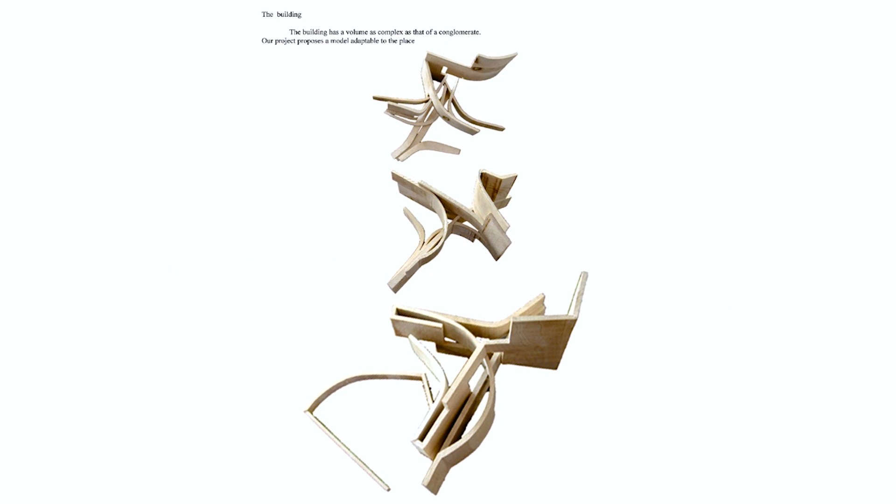This man here, I don't remember his name, but he was the one who recruited us. I really don't know how he decided to come with us to do a high-rise. And CalTrans, of course, is California Transportation, and we were very seduced by these nodes and this fantastic highway crossing that, of course, is a symbol of LA.

With this material in mind, we were trying to imagine how a new high-rise dealing with CalTrans could be. So we were imagining fantastic nodes on top of our heads, but then also fantastic vegetation and beautiful luxury, a lot of green. This was the first desire for this building, imagining this complex structure with a big heart in the middle, full of fantastic vegetation.

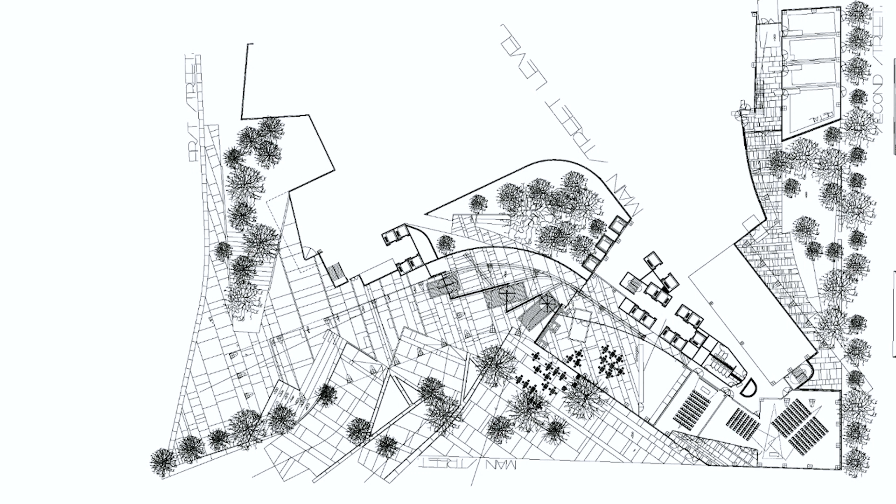So these were our drawings. Also, we were imagining giving a piazza, a public space in front of the city hall, introducing it to the building. So we were doing drawings like this one, where the piazza is the main thing, and also models like this, which little by little were leading us to imagine how these knots from the highways could be transformed.

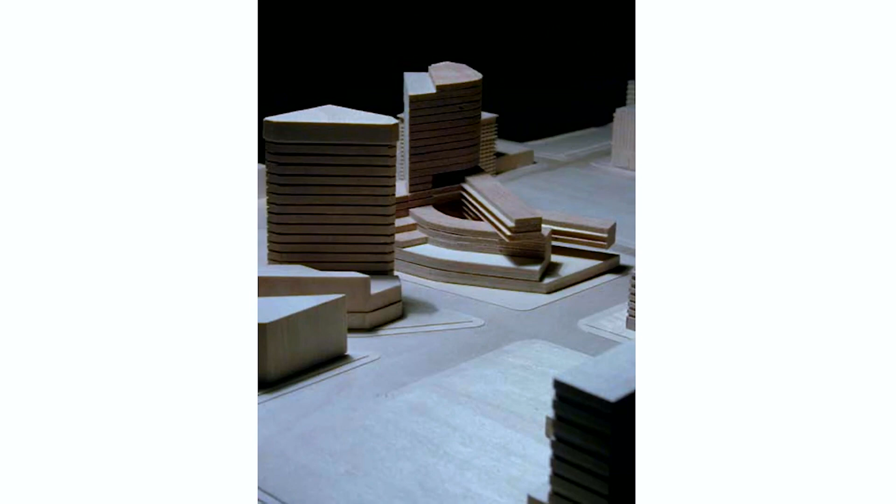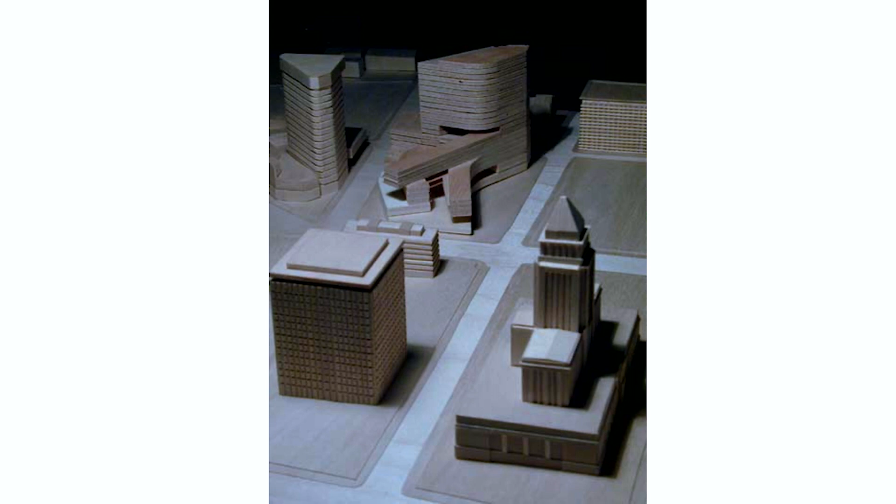Into a building which could be cheap enough to be accepted by the developer, who was actually our leader, and could relate to the rest of the high-rises and to this piece of downtown, and could be very extended on the plot, on the ground floor, and then becoming smaller and smaller, like a small tower, while going up in height. So this was our idea, and the piazza was a very important part.

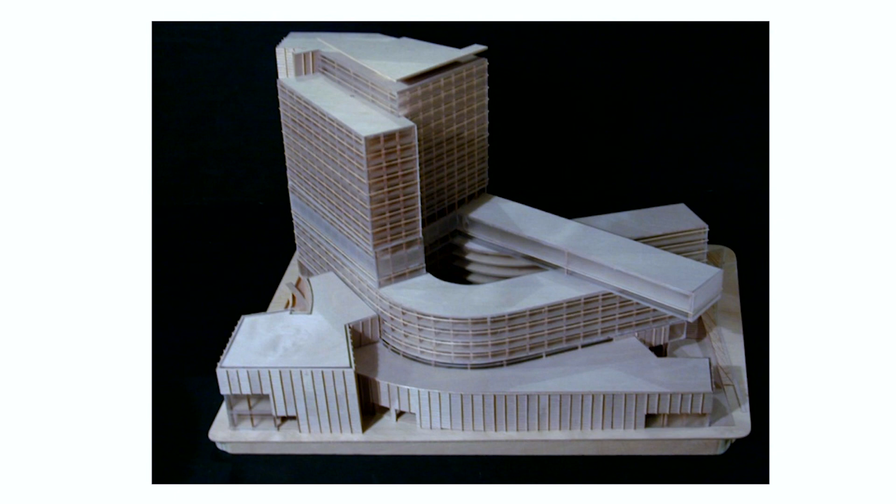These cantilever arms were kind of letting the piazza underneath, and we were imagining a lot of things, and this beautiful texture for the facade. Well, at the end we had to do this model that I didn't like at all, but never mind. We presented it, and it was real, and we had a wonderful possibility.

But then, as you know, Thom Mayne won the competition. And today I went to visit the Thom Mayne CalTrans. I think it's a beautiful building. Now, 20 more years after, I think it's a good thing that Thom won that competition. It was very logical, also very good.

At that time, the developer, who is this man there, arrived to the competition and he said, well, you listened to everything that we were trying to explain about the project. Well, actually, the budget doesn't do. So, of course, we won—we didn't win, we lost. And anyway, this was a fantastic experience.

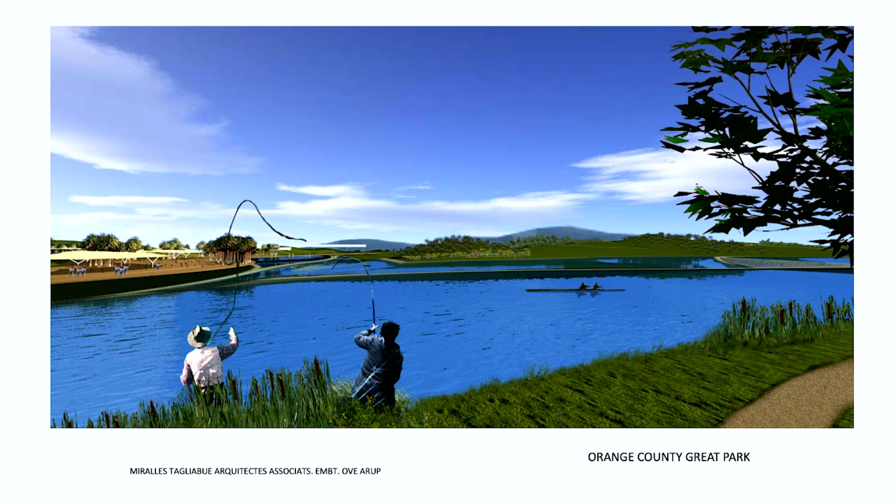And some years later, we were invited for a transformation of a military place in Orange County to become a new park, a fantastic possibility of a new natural place which could make the neighborhood rejoice in this beauty and also create a new life around that.

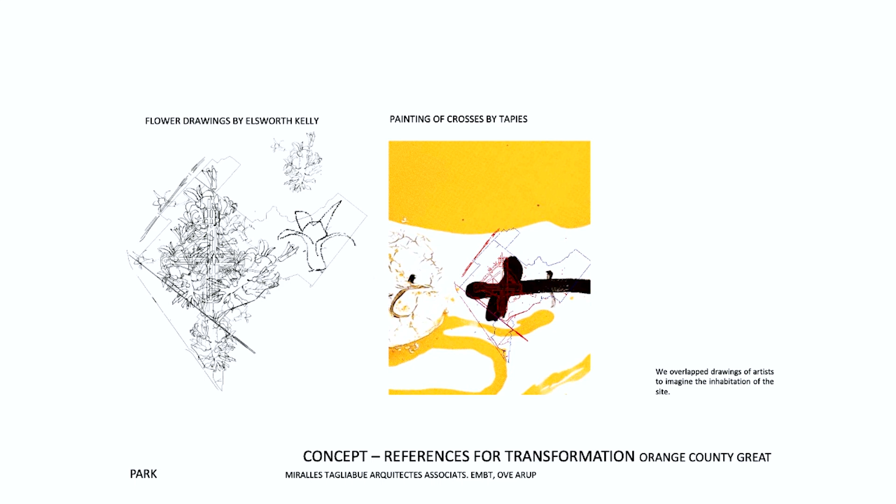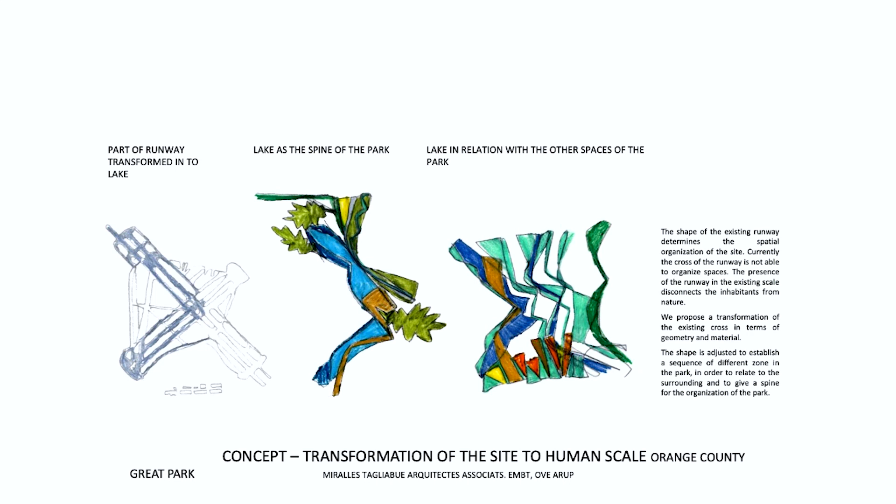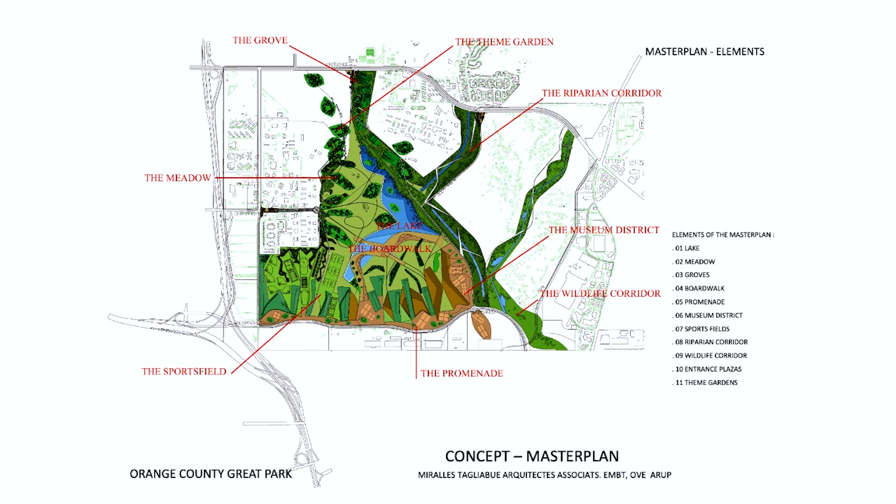So we were playing, I think, with Ellsworth Kelly, with Tapies, who is more from Catalonia, from Barcelona, where we come from. The idea was how to transform this very rigid military runway into a park, into a lake, how to make this become a natural line. So it was a very playful type of competition where we were imagining a lot of things happening, because this was absolutely enormous, very, very big.

So the present is rigid, the future is kind of introducing this organic, natural shape. And we were doing these colorful sketches which then little by little were becoming the drawing. We had this conversation, which was actually going very well. We arrived to the final jury after many conversations with the people. The jury even came to Barcelona, and we lost again.

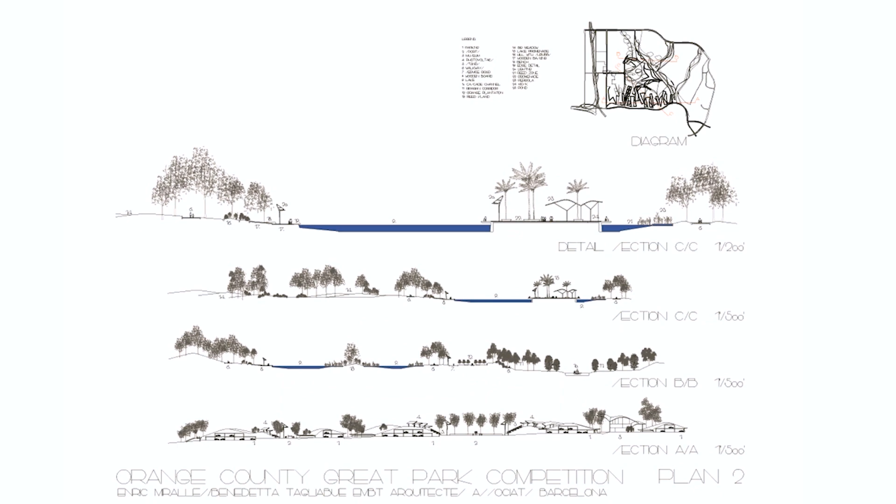But never mind, these are things which are happening, and all you learn through these competitions is very important. I put this drawing because I noticed that the structure is a little similar to the one you have in front of SCI-Arc, you know? It's a dream like that.

And we produced these models as usual, and this was the experiments we had in LA.

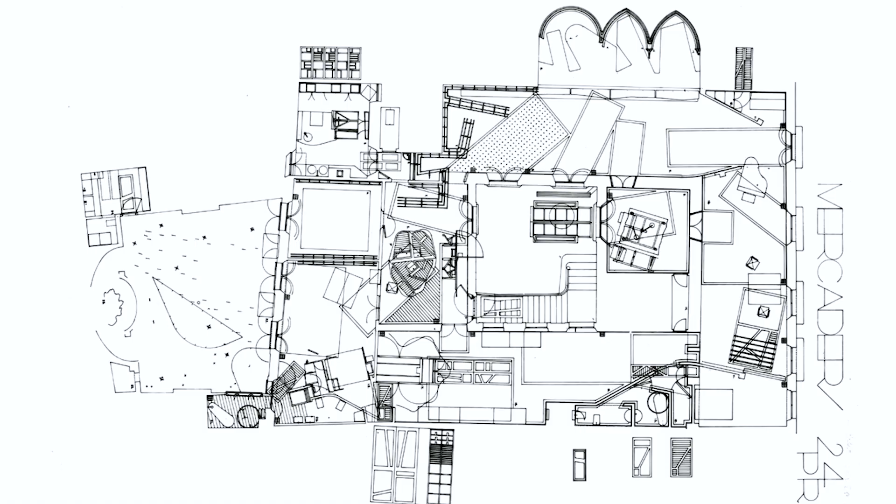But usually, I think we start our understanding of the world and our projects by our home. Recently, I understood that our home, and the experience of doing our home together with Enric Miralles in the 90s, in an old building in the old city which was abandoned and used as storage, is absolutely present in many of the projects we are doing till now. I think this discovering how to work with a pre-existence, how to put in value something derelict, and how to rework it, and discover that this architecture is fantastic with a lot of secrets you can discover, and try to live together with ancestors, let's say, with all these people who had been living there before us, understanding that we are only one more trace among the many traces that happened here in the past during more than 800 years, maybe more, because we are in the old city of Barcelona. So all this relation with the past, and how to feel this kind of humble feeling, was very important for everything we did afterwards.

Enric was working from here, well, only during weekends, because during the week we were in the office. He was in this fantastic position where he could control all the windows, a fantastic enfilade, and the house is revealing a kind of layers and layers, like a world behind it. So let's see, this is a little film. In spite of everybody, I was very attracted by these houses, which look so deteriorated from the outside, but with all these fantastic big spaces inside.

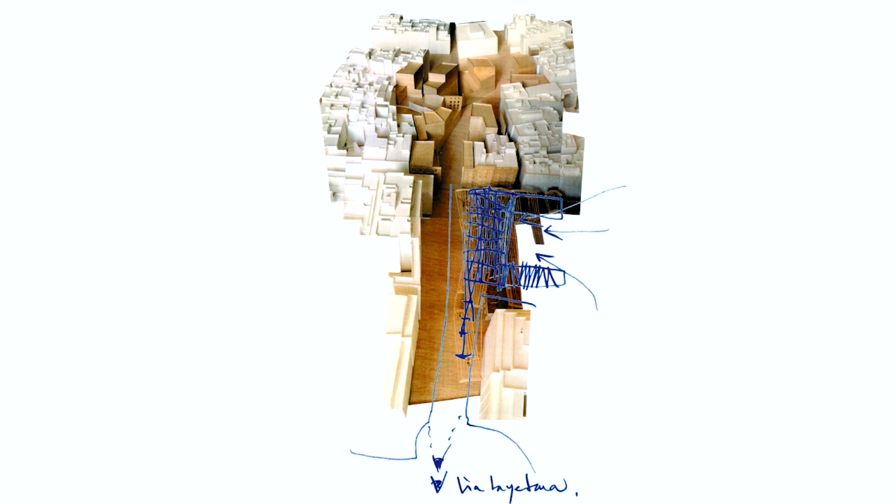So when we started to converse with the city, because they wanted to throw everything to the floor, we started to convince them that maybe the new buildings should be next to the old ones and learn from the old city, and also try to make the market expose the beauty of the inside to the outside. We were doing all of that because we really loved that piece of city, we really wanted it to become better, to be the extension of our home. Santa Caterina was a project that we really loved, and where we worked with a lot of attention and presence, with a degree of experimentation which maybe in another project further away wouldn't have been possible.

So we maintained part of the structures, but with new structure embedded. For example, you see this roof, the old parts of the roof are reused, but in a new structure. And the outside of the roof, we thought it would be fantastic if it could tell the city from a distance what a beautiful world it is inside. Because in a market, when I went to Barcelona, I was impressed — the market is a fantastic place where you have this world of fresh fruit, fresh food, a culture of eating. We thought this beautiful culture could be visible, could be put onto the building itself.

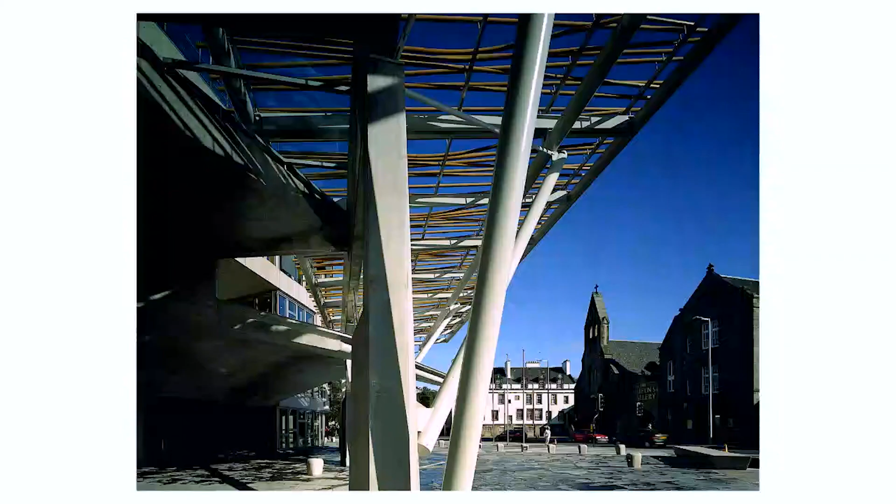Thank you very much, Hernán, for what you said about the Scottish Parliament. It was by far the most difficult building we have gone through.

Enric died in the year 2000. Really, the building was not even started - we had only started the foundations. And since then, it was a political fight all the time, very, very incredible. This morning we were talking about it. It was so complicated that I totally forgot about it, but if we had to remember it, wow, it would be a book about Scottish secret politics.

But at the end, I think it was worthwhile. I always had in my heart the idea that the building itself, at the end, would survive all the difficulties, all the politics, history, secret corruptions. A building like this with wood, kind of reminding a boat, because we had this idea that the parliament should be like a boat, with no real place, but like something navigating in the sea, would be something you could use the first day - as this is the opening - but also something that would go on influencing people for more and more years.

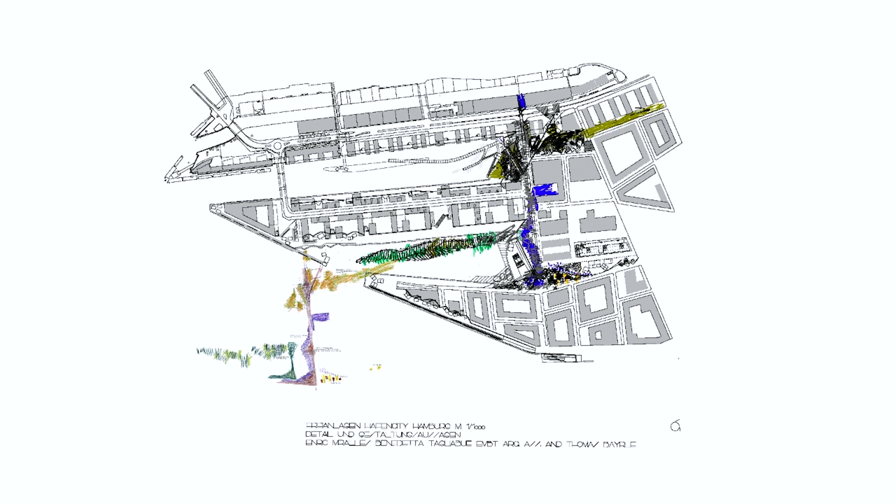So it would be fantastic to return this to the city, to return it to the people. We did a competition on the public space, on how to transform the public space of the Hamburg harbor in order to make it more permeable, to make people participate in more parts of it, to have floating piazzas in the sea, and to have the abandoned parts becoming beautiful natural places. After more than 20 years, these projects are still very, very slow.

No, they go on for years, we are still working on that. You see the southern part, we are still finishing that. But you can see that the drawing became a reality. In fact, the Hafencity is working and has this concept of entering again into the water, having this mix which was happening during the harbor time, between where you can stand on your feet and where you cannot because there's water. This mix makes the harbor become more near to the scale of the people.

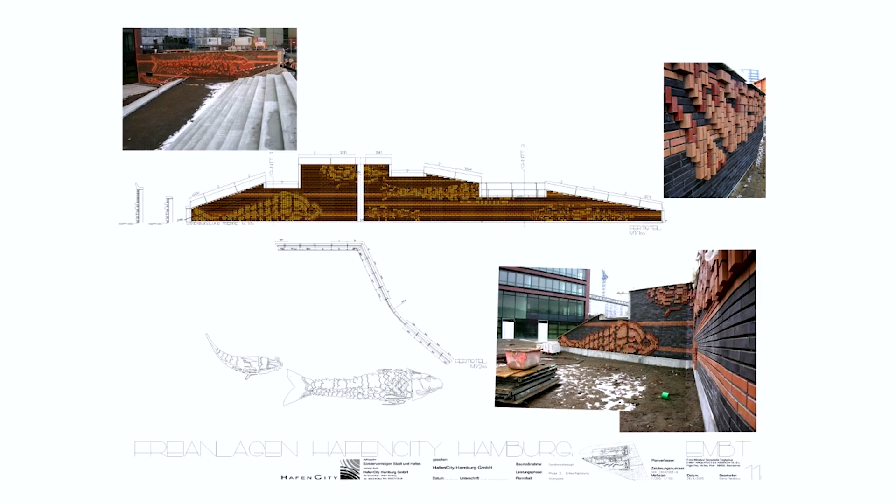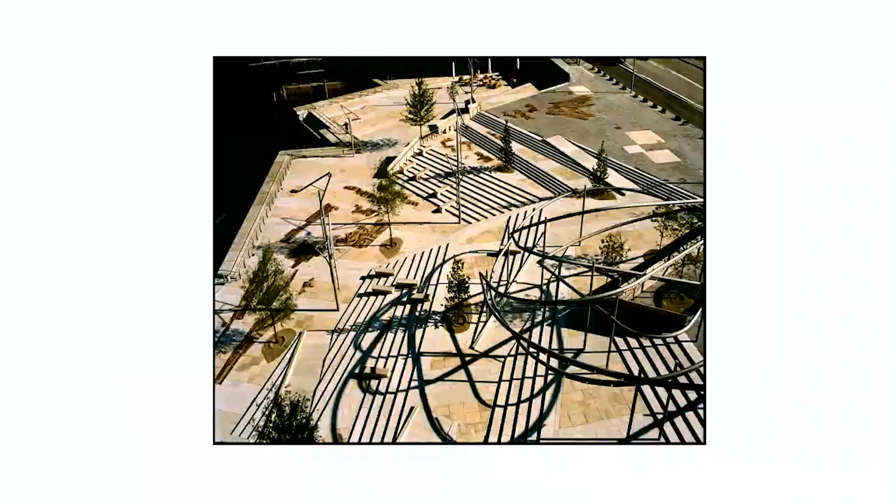We also did a lot of things on the walls, decoration with bricks, which was actually something traditional here. The Speicherstadt is very much about that. This is also with the idea of entertaining people and making people feel there's something to do, that these great distances are fulfilled with a lot of things happening, pavimentation changing, new lights and trees growing, and stairs bringing you little by little near the water, even if the floods are very dangerous.

But you can go near the water with special systems telling you, alerting you when the water is coming up. So I remember people in Hamburg at the beginning when we won the competition telling us, 'Oh, you're too Mediterranean. You think that in Hamburg we are like in Barcelona. Here is a very cold weather.'

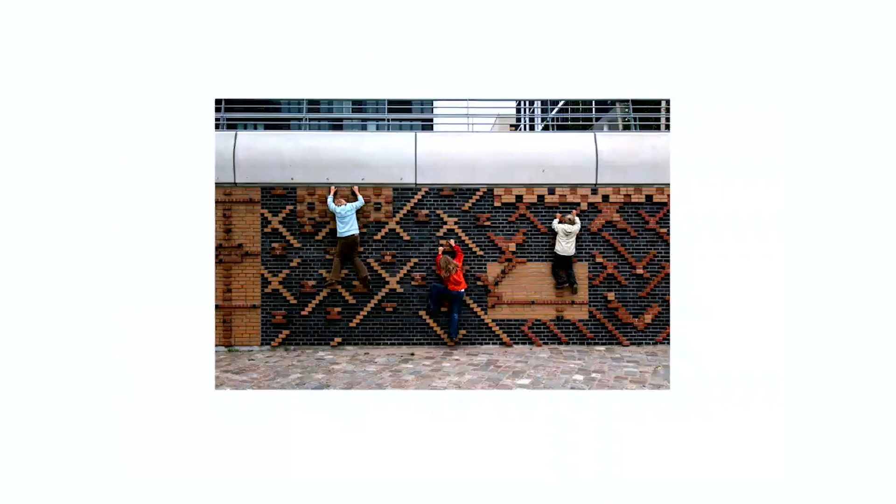But in fact, people now that it's built, the possibility to have a park, to have a space like that, makes people use the space and get the habit of going out, even if the weather is not like Barcelona. So I appreciate very much these images where people are actually using this harbor and all the features, and this is becoming really a lively city.

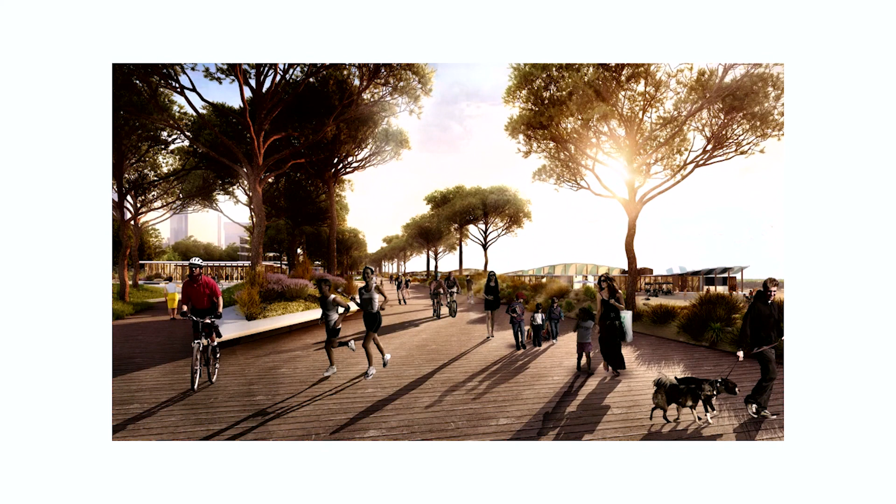And in Italy now, we are doing something similar, but in a totally different place. This is Rimini, which is the most massive seaside place in Italy. It was the place where, in the fascist times, they gave the idea that going to the seaside is healthy. Before, nobody was going to the seaside. But here they started, and they maintained this as a very massive activity.

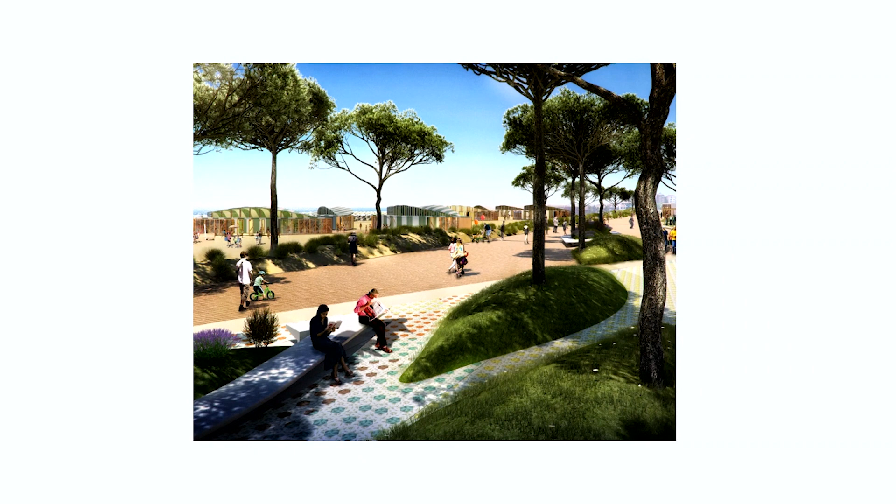So they had a kind of back street here where you see this natural place. Our project had to transform this back street in order to reconnect the city of Rimini with the seaside and make the seaside a little less massive, a little more transparent, so that you can start to see the sea again from the city.

So this is happening right now. You see on the lower part, the street that we are transforming into a kind of multi-purpose place where you have bicycles and people walking, but mainly you have this idea of the seaside as a natural place, where you can find trees, shadows, herbs that have a beautiful smell, you can go making sports, and you have a connection with the city on the other side, which before was really cut off.

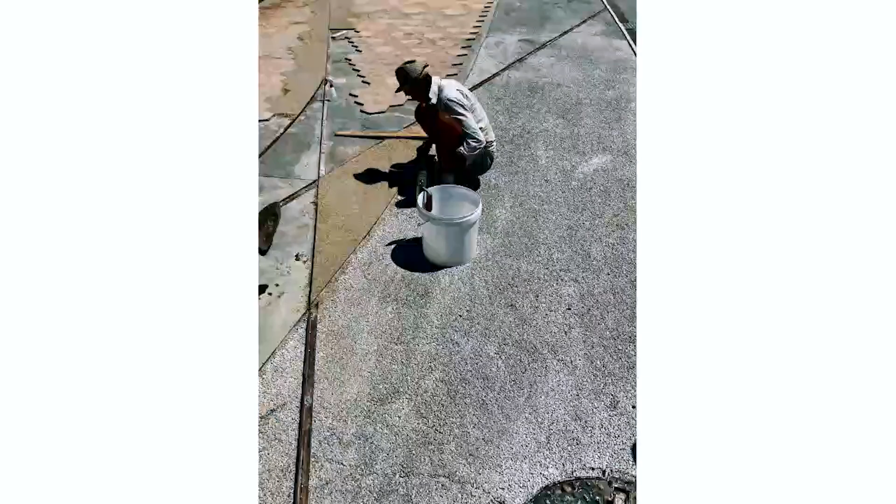Also, this is a first gesture for the city to change the buildings, which usually were kind of cutting the way towards the sea. We are designing pieces, and we are trying our best to make each one of these 8 kilometers recognizable by different colors, different motifs, using this ceramic, which is a typical product of the place.

So now we are going to China. We started in Los Angeles, we went to Europe, and now we are in China. And China is a place which I love very much.

You know, when I was 18, I don't tell you the year, but it was a lot of years ago, I was brought there by my uncle, who was making commerce, buying and selling small pieces, mechanical pieces. And I fell in love with China. And I think this idea, I want to go back there, made me go back to China.

And actually, we won a competition for the Spain pavilion in Expo Shanghai 2010. We proposed for that competition a pavilion which would be done in a craftsmanship way, because we were thinking that maybe we didn't have the same language with China.

Maybe at the beginning, from Spain, we were kind of doubting how we could communicate. And we thought that hands can always communicate, something that gives a universal language, a little like digital language, but the hands language is an ancient language which is absolutely the same everywhere in the world.

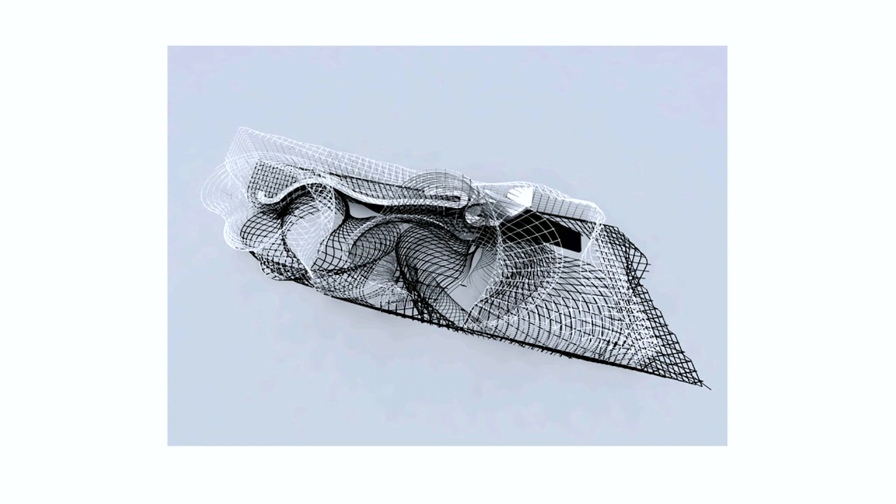And actually this was done. The structure underneath was a very complex structure. We were proposing something very dynamic because it was representing Spain, a kind of very dynamic nation.

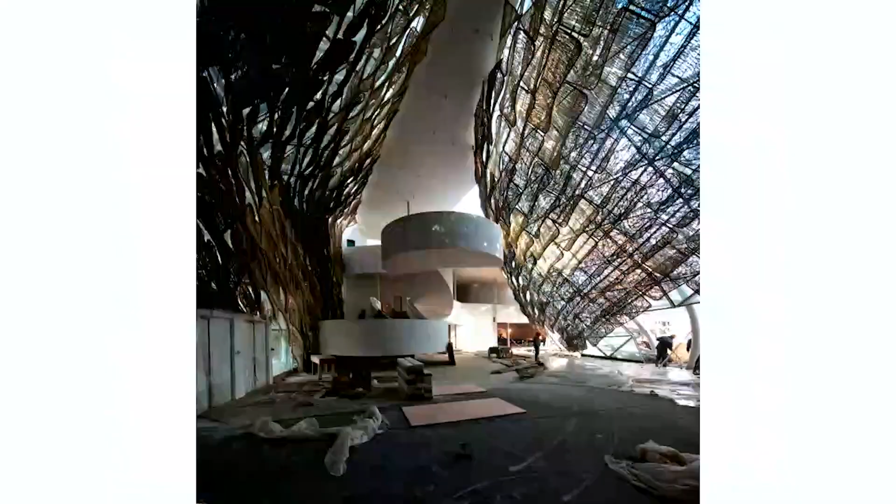And on the outside there was this idea about better cities, better life. This was the lemma, and we were thinking better cities is maybe the city which is able to bring the city next to the countryside. So we were proposing a way of building a future city with handcraft and with an attention to what happens in the countryside.

And this was introducing in the Expo Shanghai this feeling of a natural place, more natural place, where you could see the shadows very well, also the smell of the building, which was changing with the weather. When it was raining you could smell the panels very, very much, but it was a beautiful one because it was a very natural one.

And this was really our entry into China. I had no idea how it could be this building, but it was then the beginning of many other projects in China which are still going on.

And recently we went back with Zoran, who is here, and other friends, and we went to see where the Spain pavilion was. There was no more pavilion, nothing was remaining of that, but a new park which had beautiful undulating lines. And I had the impression that these dynamic lines of the pavilion were in a way remaining in the park, which now is instead of the expo. So in China we could have beautiful possibilities.

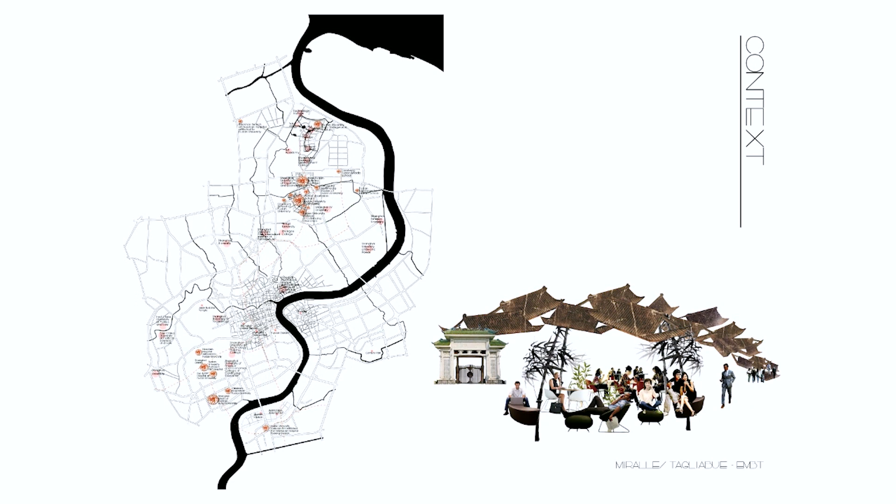Rafael Moneo was always telling me, why are you working in China? Why don't you concentrate in Europe? I don't know, I think because it's a beautiful possibility.

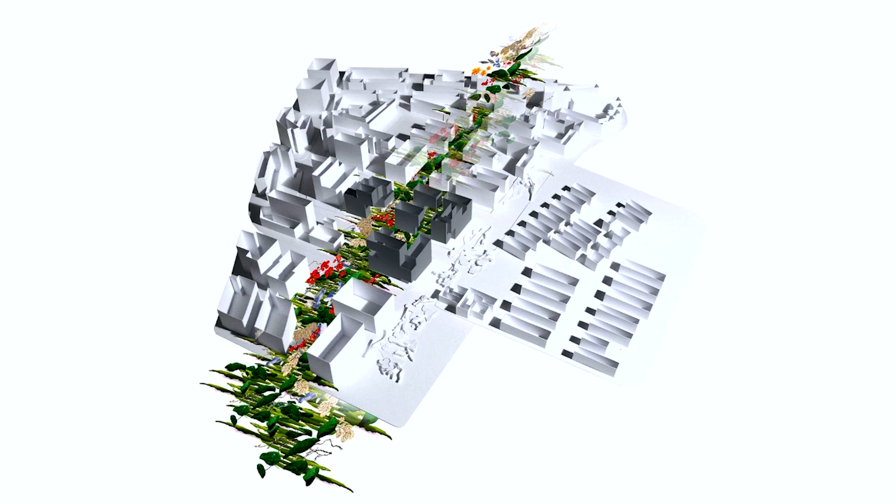In the years 2010, 2011, during these years, we had this possibility to be in contact and talk to each other. And for example, when we participated with this competition for a new university, business management university for Fudan, we were trying to explain in the competition that we wanted the university to be an occasion to introduce qualities in the city.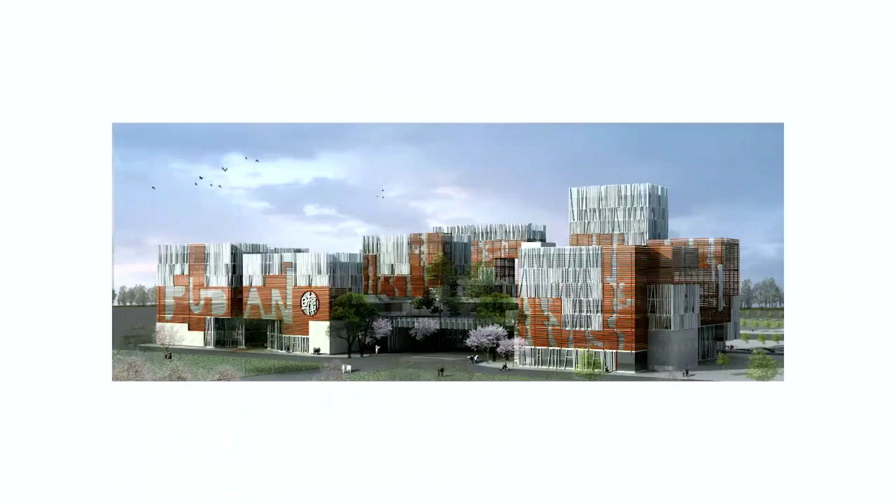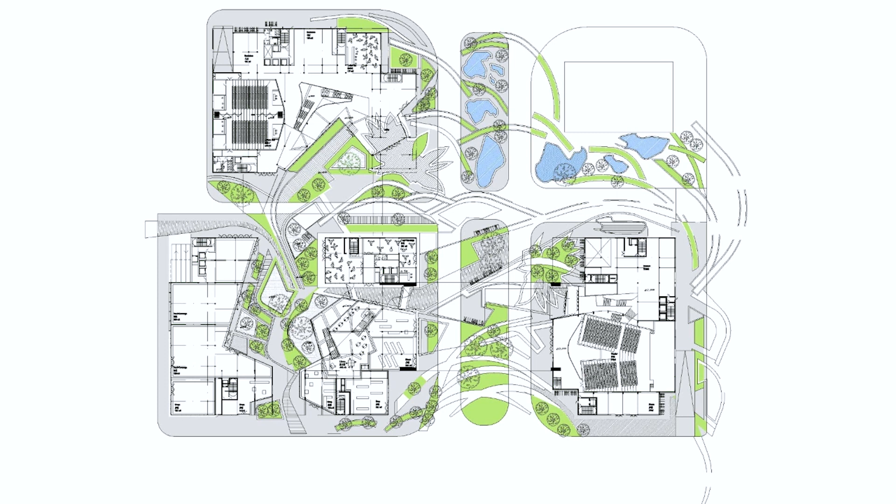And vice versa, not a closed campus, but a campus which would make the city better, would create piazzas, would create passages, would make the students go around and go in the city, and the city go in with shops and food courts. These are actually three urban blocks, but they work as one, and they make the city go inside through the avenues, through the patios and courtyards, and the buildings are connected by these bridges which connect the different functions that you have inside the university.

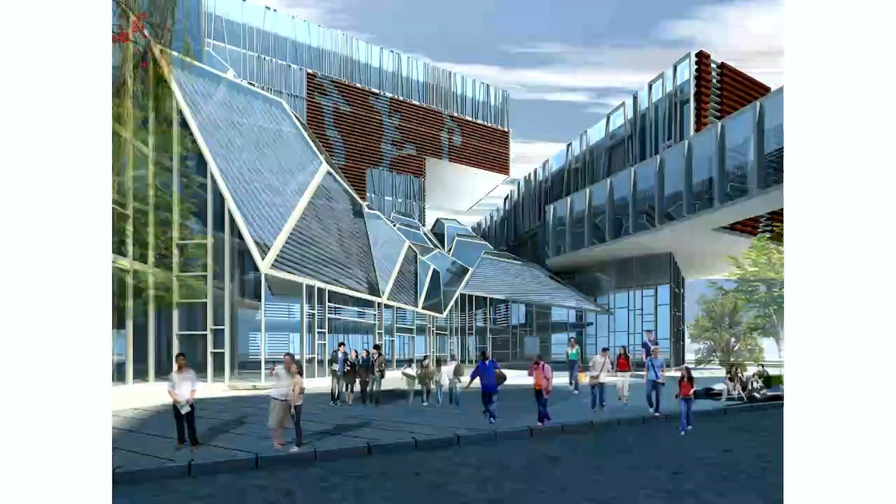So the patios are covered by these roofs, which create a kind of public space outside and inside the building. And as very often happens in projects in China, we were not able to be present during construction, but the drawings that we gave them were, I think, built quite literally.

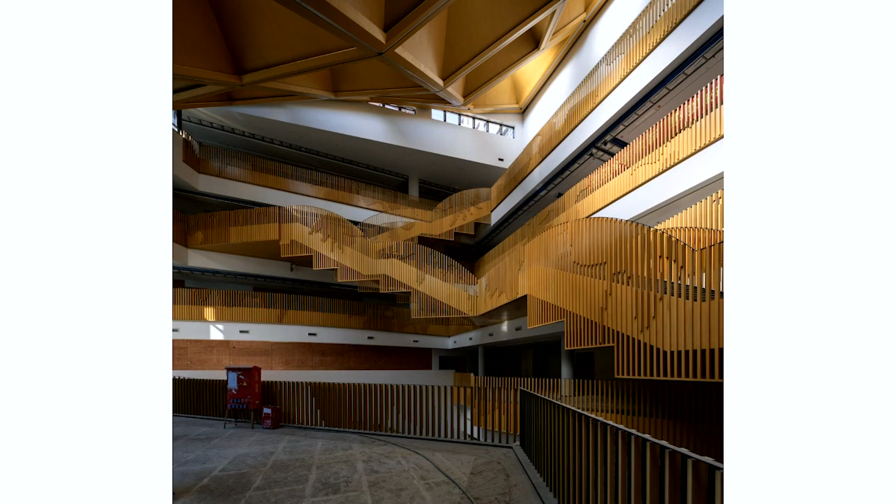And now the building is done with these connections of the three buildings through the Great Bridge on top of the avenue, and the creation of the series of piazzas inside the blocks, which will probably give the possibility for the city to be enriched by the presence of this university building. So it's not only a university where people can study and learn, but also an occasion for the city and citizens to get near to the learning and to these fantastic facilities that a university is giving.

So still, this trip after COVID in China was very impressive. And we didn't put in the project 'I Love Fudan', but they learned from this system of the louvers that we gave them, and they have this as a symbol - this bridge on top of the avenue - as a symbol of Fudan.

And also we had a possibility in the center of Shanghai to make something similar to what we've been doing in Hamburg or in Rimini, to renaturalize a piece of Nanjing Road. In Nanjing Road there is a place called Century Square, and they asked us to give ideas to make it better.

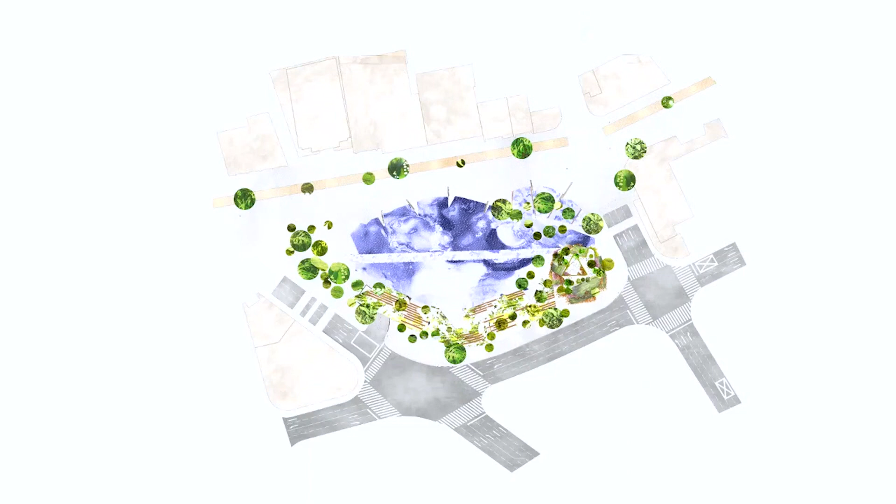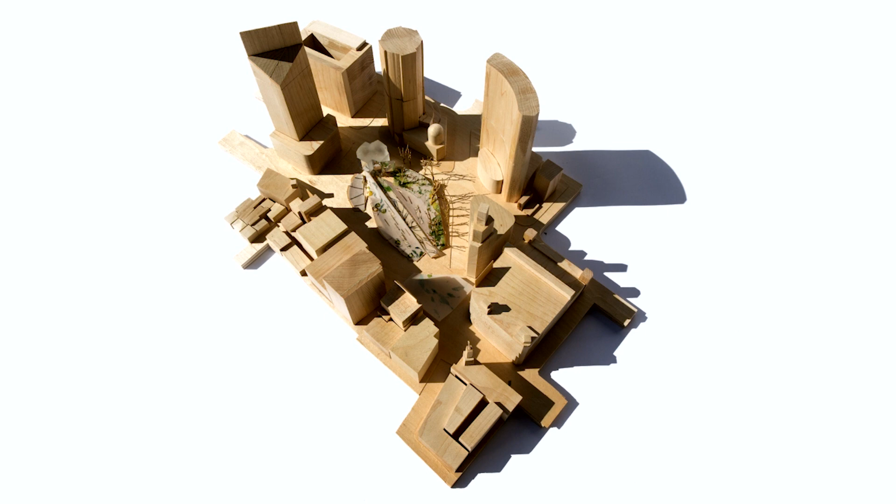In Century Square, usually they have events and a lot of activities going on. We were proposing to cast into this piece of city also a reminder of the blue of nature. In a way, Shanghai is a city on the sea, on the water, but many times you don't notice that. We also planted a lot of trees and shaped it so it separates the traffic from the inner part of the piazza, so that inside the heart of Shanghai you have a more naturalized place where a lot of people are passing by.

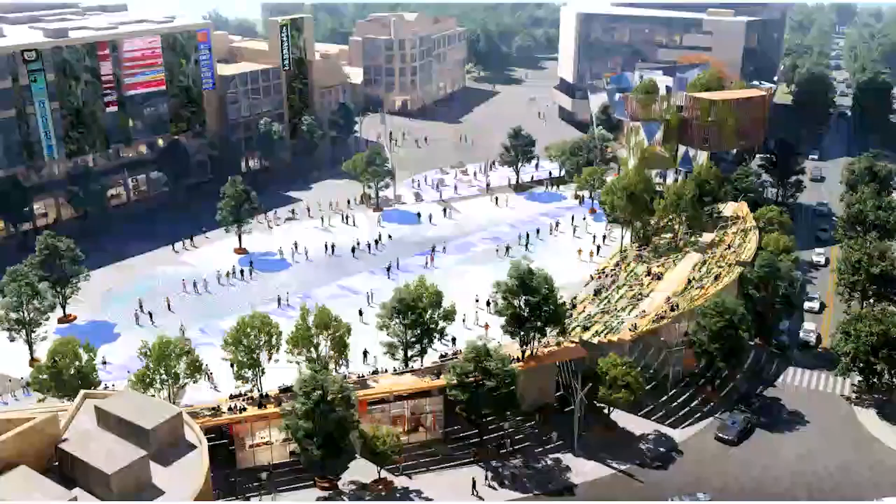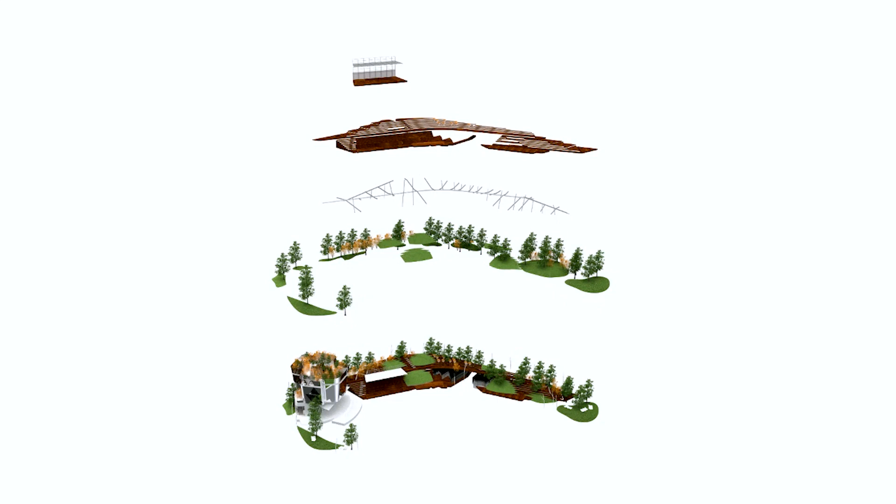This is Nanjing Road, so there is a lot of passage, but here is a sort of more relaxed place where some grades are separating it from the traffic. A little building, which is reflective, gives back all the lights of the surroundings, like Times Square in Shanghai. So we have these little hills with trees happening.

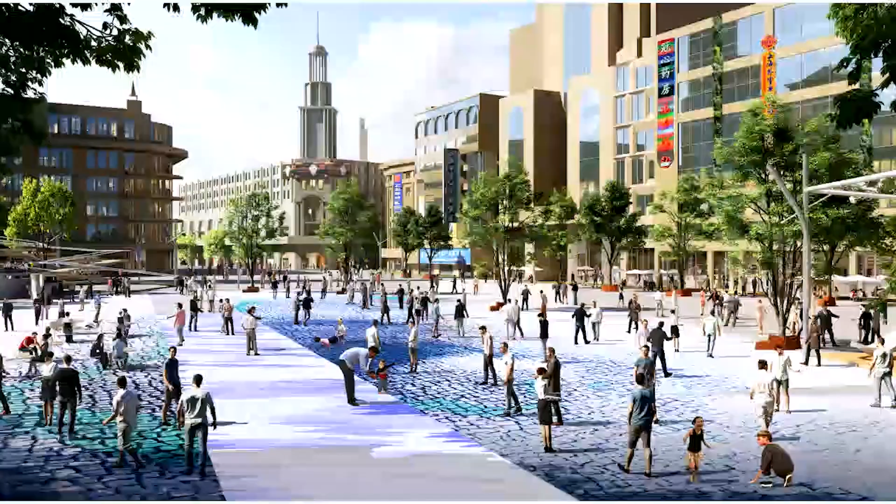These were the renders we were giving during the COVID time, where we were always on video lectures talking to each other. This is a view from the top some months ago. You see the green grades on one side separating from the traffic, the building, and the piazza, which is a different color, indicating more of a special place to stop.

And we were going to visit it under construction. Of course there are a lot of things I would do differently if it were my decision about the last detail, but here I cannot decide.

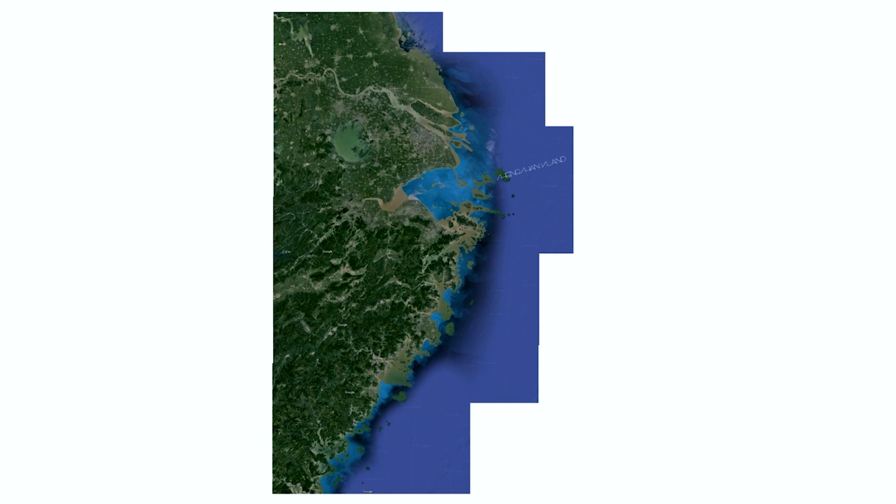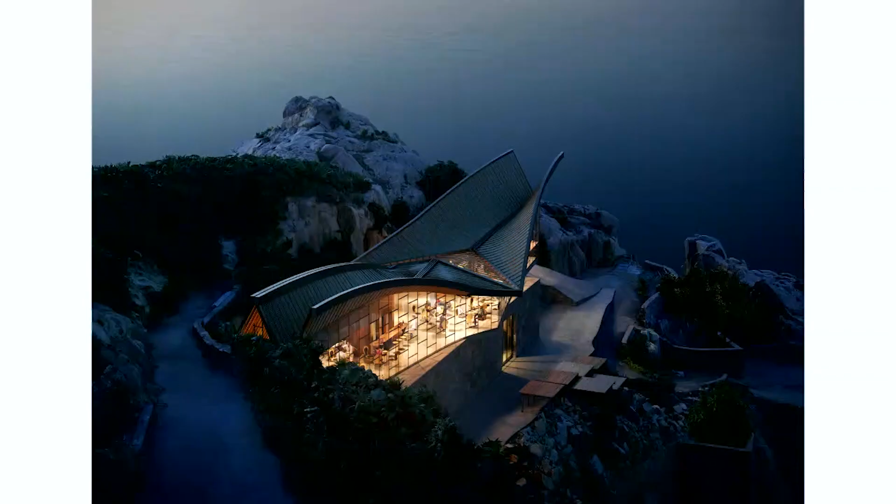But we are very happy that we could collaborate with something that maybe we had in mind, they didn't have in mind, and it's a dialogue. We make a lot of dialogues of this kind, because in China we do many competitions of this kind, like this one where they asked us to put some facilities on a small island on the east of Shanghai. It's very nice to have these possibilities.

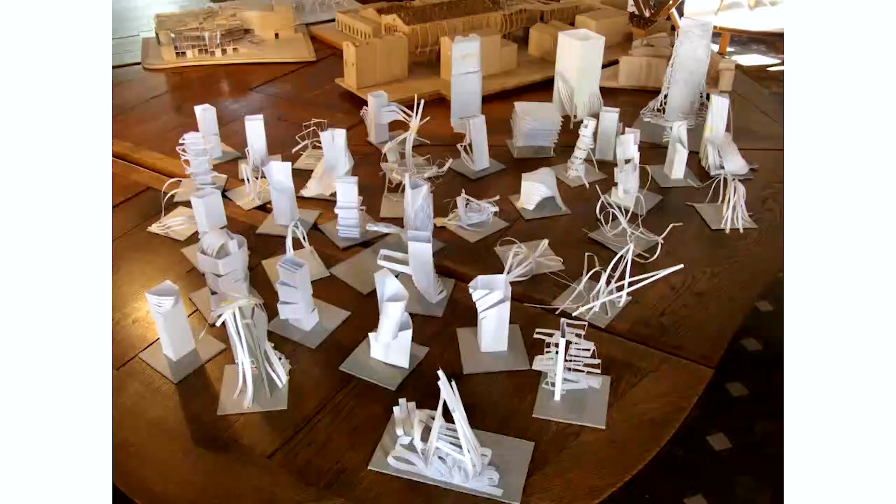And also in Taiwan, in Taichung, we had the possibility to make a high-rise building, which was, let's say, what we tried in Los Angeles, then we could do in Taiwan. And I like to start with the idea of how we began the high-rise.

They came to us and said they would like us to design a headquarters for this company called ChinaTrust. We started with a game with the people of the office, and everyone was doing their own special high-rise, and then we put it together on the table of the office. And this was really entering into the final design.

Then we were also looking at their philosophy. The central person is the head of ChinaTrust, and he was playing a lot because their slogan is 'We are people,' and this playing with the word people, we thought it was very, very beautiful.

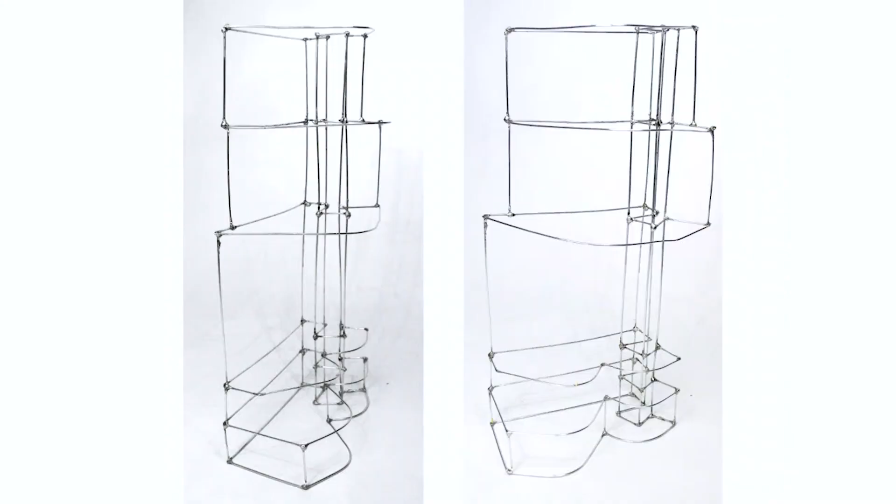This is a place where we had to insert our new headquarters, and we thought it would be nice to have good feng shui. We were very impressed that in Taiwan, more than in China, people talk about feng shui, especially the business people, because they believe the building greatly influences the activity that goes on inside. So if you make a bad feng shui building, the activity of the company will go down. We were trying our best to respond to the feng shui.

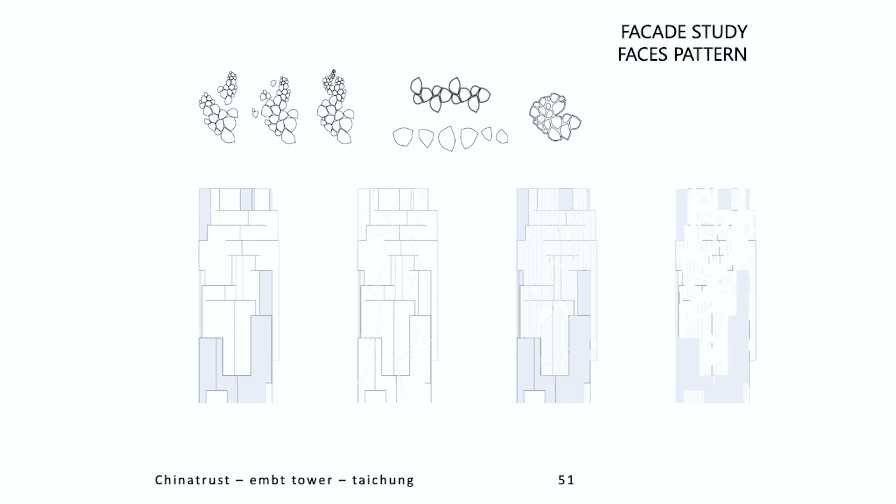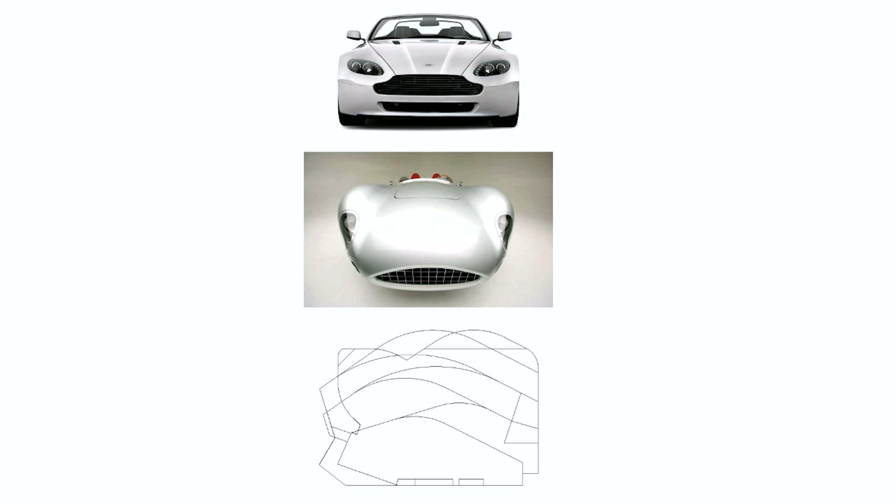The owner himself asked us to make a building which would look like a tree. The name of his father, the founder of the company, was apparently Gu, which means pine tree, cypress. We started with all these symbols, trying to make the building as natural as possible, introducing shapes, also games like the Bugatti curve, so that the building ends up introducing this natural world through the terraces and the curves, which dilute the strength of the angles of the rest of the building of the city.

The back of the building is like the spine, the important part where all the elevators are, maintaining the strength of the building. So there's a kind of softness in the front, and this stronger spine, stronger back, on the inside of the block.

We had to watch this building grow during the COVID time, and we could go there recently on the same trip where we were visiting the rest of the buildings, and we discovered that the piazza in front of the building is actually working very well.

We designed the pavement, and the pavement creates the border between the building and the street, creating a kind of park, a small park.

Then the facade is also working, making this organic feeling of the building, and the terraces where we were taking photos with the CEO, and the facade that we had been studying, with these micro points, which from the inside are black, from the outside are white, so that you don't have the vision impaired from the inside.

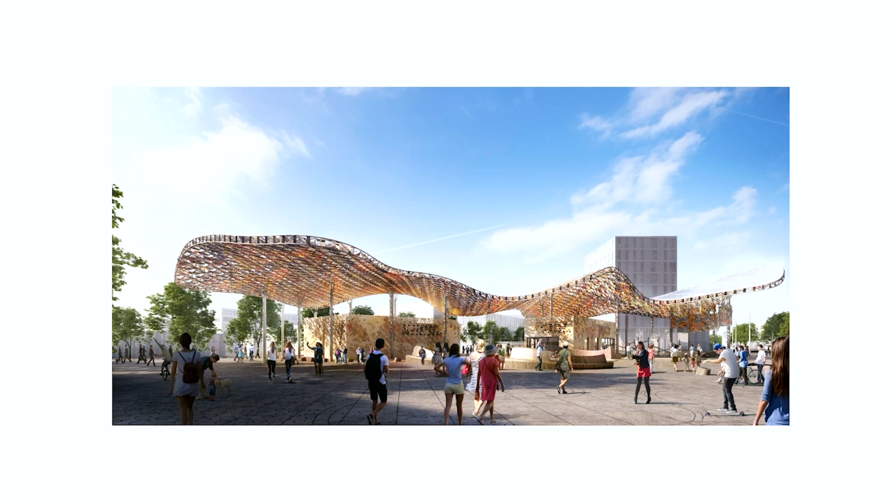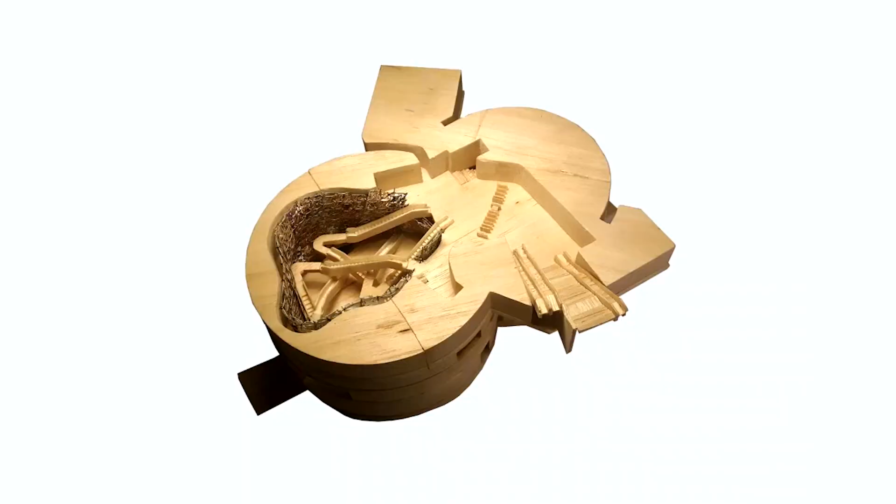So very little building and a lot of open space. And the inside would be like a very light inside with a lot of stairs so people could meet. And this is what we are developing since long ago.

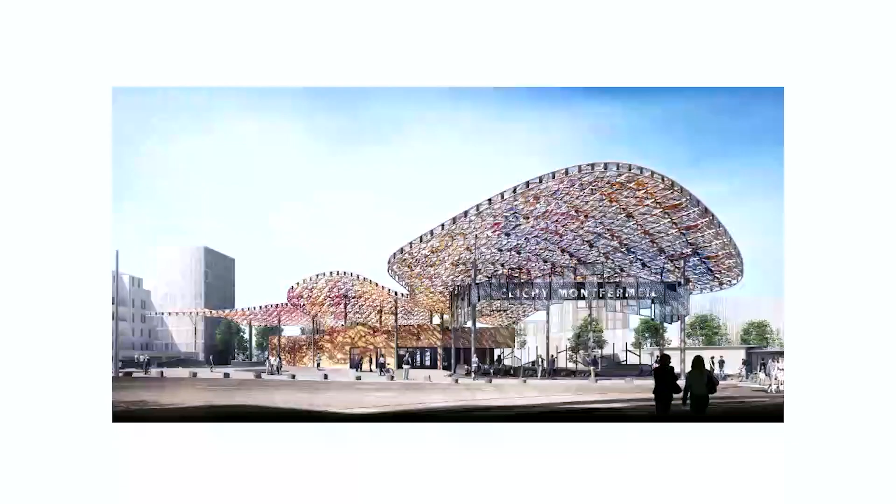So the structure of the pergola was studied very much in order to be a continuous canopy. And we were trying our best to include these new materials, which were kind of textiles.

And we worked also together with women of the place in order to have these workshops deciding what color do you like, what material do you like, what is your favorite dress. And with that, we made this collage, and the collage was at the end used to make the coloring of the inside of the great hall, and also of the pergolas.

And we took every occasion, like for example the Biennale in Venice, to experiment with this material and to see what it could be. In this case, we wanted this to be in textile material, but it was not possible.

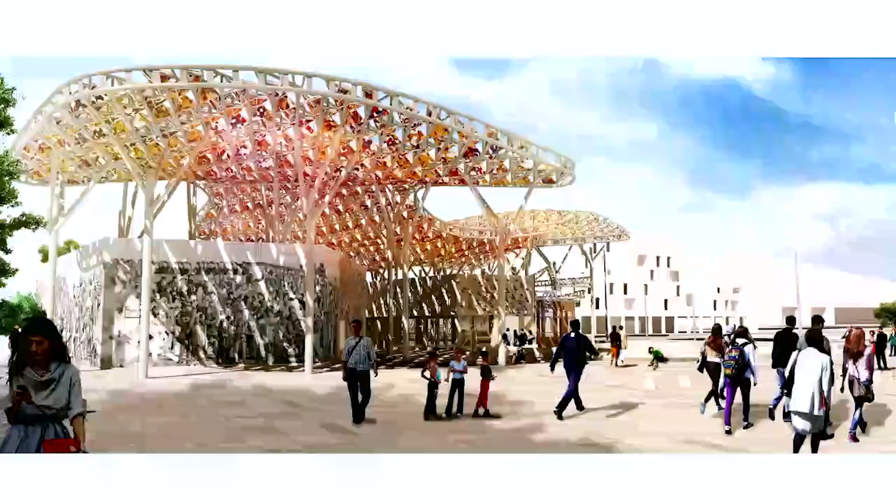And now art is being introduced into this station. A good artist called JR was born here, and he will make a kind of big, heroic ceramic mural on the walls of the station, so that the city will be reflected in the mural, but also in the colors of the pergola.

And now the big engineering work is happening, with these fantastic big tunnel machines going on.

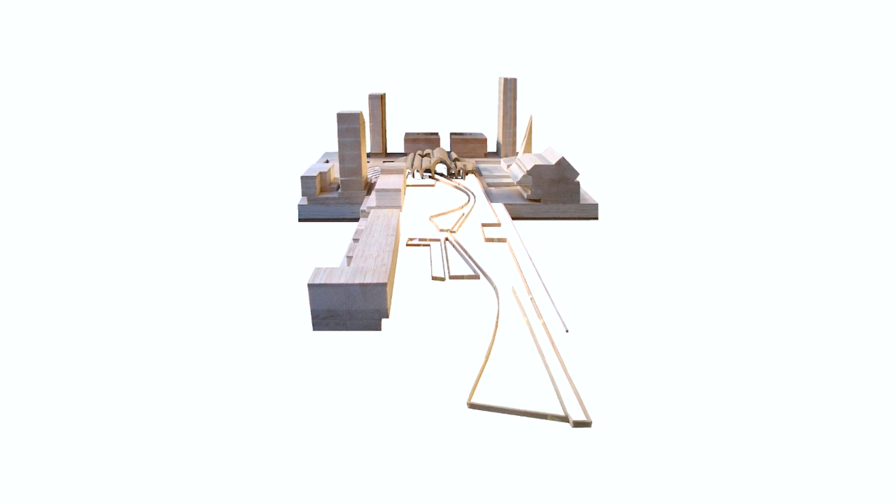And at the same time, in Naples, we have another station happening, which is in a very, very special place. It's a very mineral place in the city of Naples. And so we tried our best to give a station which was very natural, making a contrast with downtown Naples, which is like that, you see.

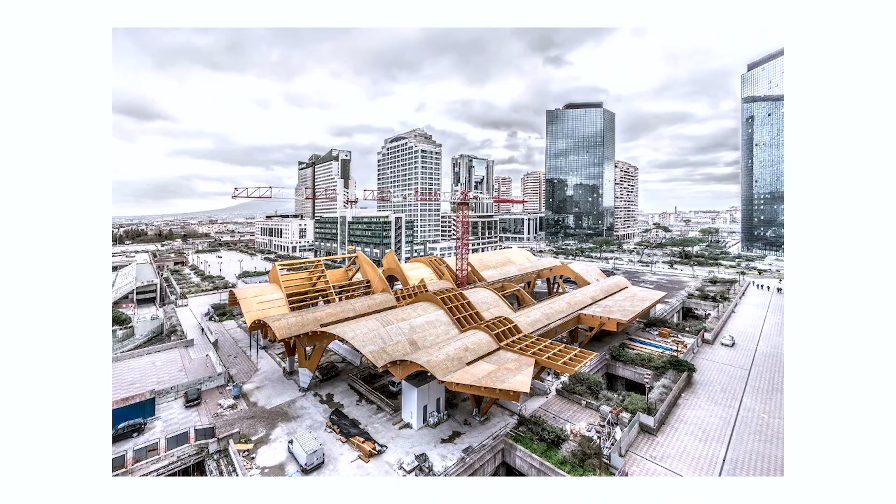It's a very tough place, which was never really accepted by the city of Naples. So we are now at this stage, and I was explaining, Hernán, that Naples is a very strange place where nobody knows if they will finish next month or in 10 years' time. For the moment it's 10 years' time.

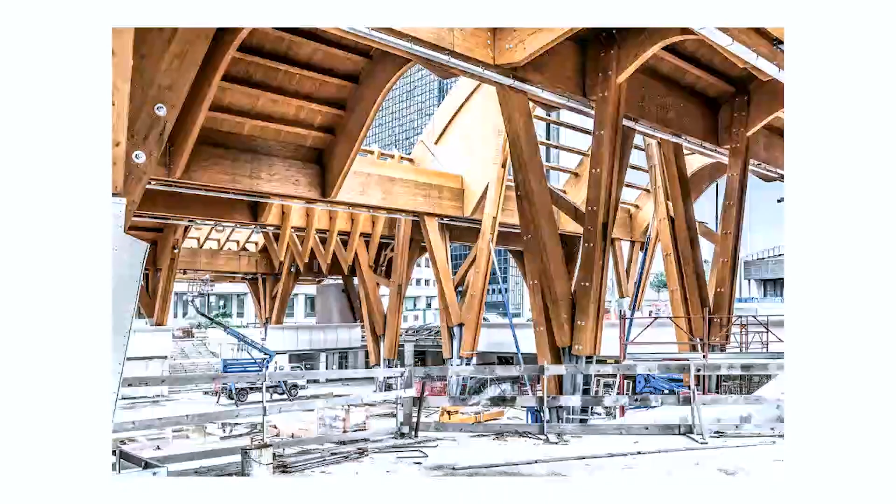But they already have this structure in place. The trains are getting very near to being in function. So we hope that soon we will have the station functioning, and the image of that is really making these natural shapes emerge from underneath the soil of the city of Naples.

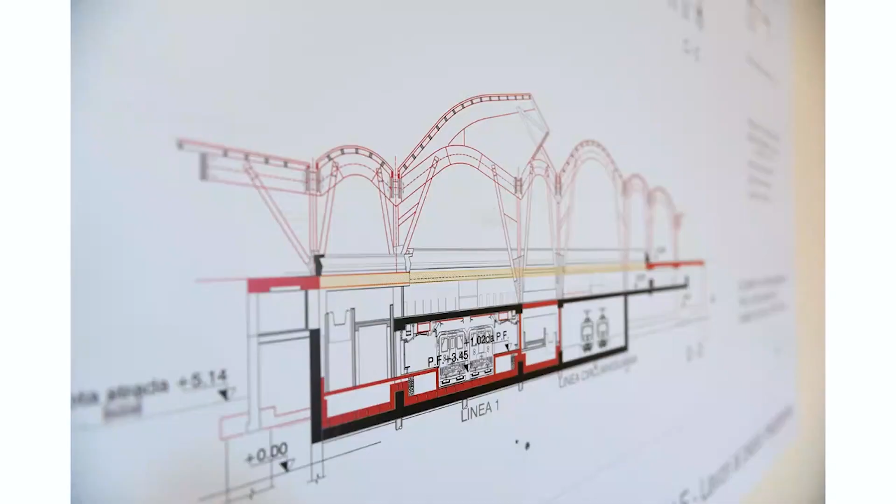I'm sorry, I'm going very, very fast because the timing is 500 slides. Actually, it's too much.

This is the art that we want to introduce. Nobody knows if it's going to happen because it's Naples.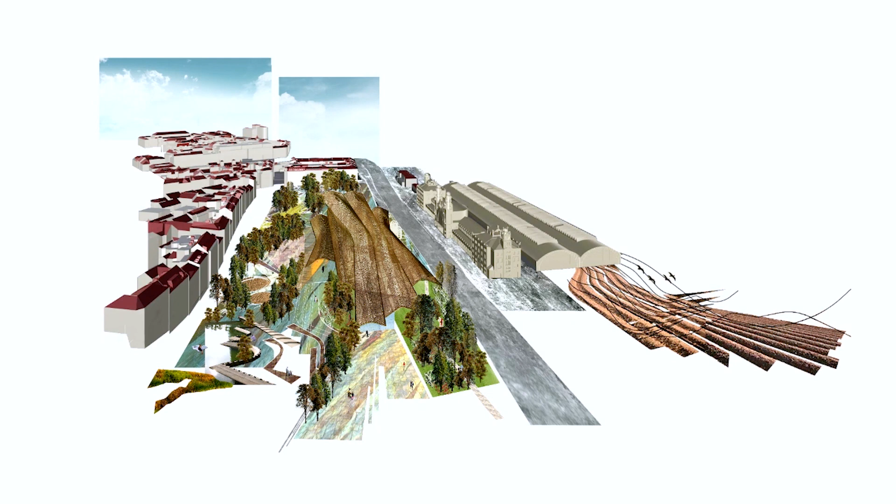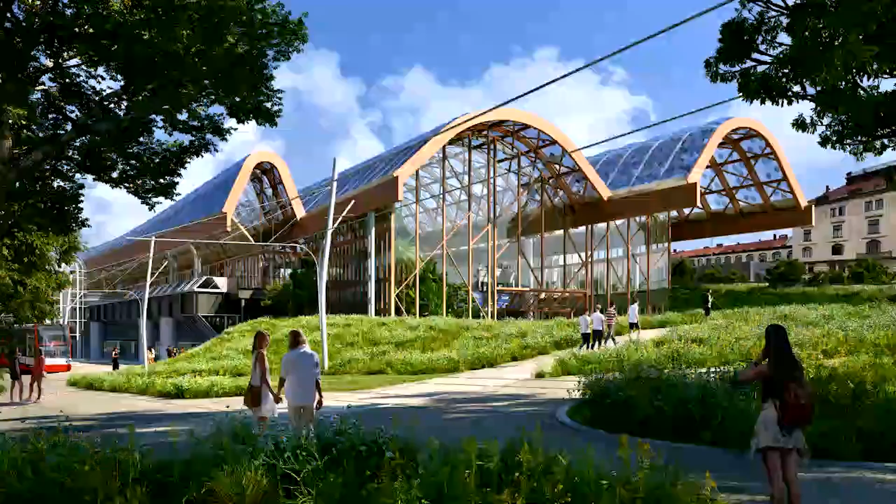Of a new roof, which created the connection with the park, with the space on top, with the old coverings of the rails. And it was, as usual, very beautiful to make a competition, because it's a possibility to try your best and to be in contact with other engineers.

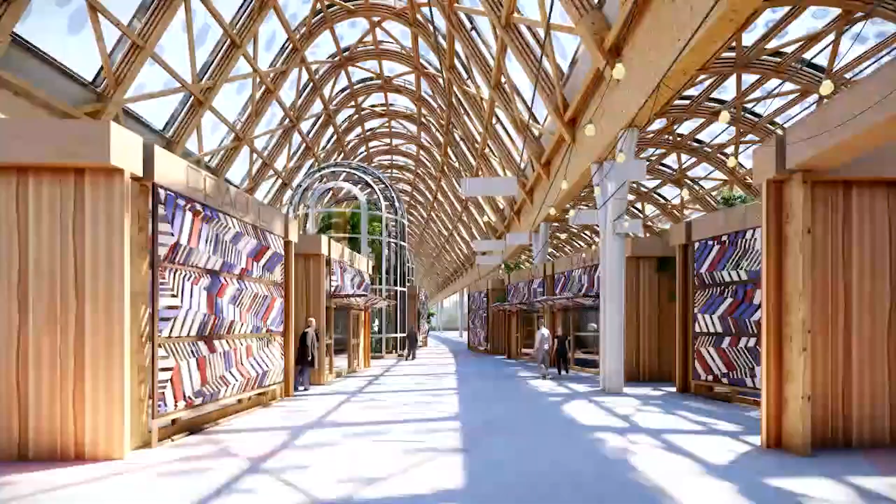For example, we were in contact with fantastic wood engineers who were teaching us how the curve can be well calculated so that this works as a shell, and you can have as little effort as possible, as little material as possible. And this big cover was really creating the connection between the old building, the new space on top, the park, and the existing secessionist building.

Going fast, I'll go to the building we love more, because we finished this going very, very in detail. In China, we never had the possibility to detail the project that we do. But here, in Italy, is a fantastic city called Ferrara, which is very minor, but very beautiful.

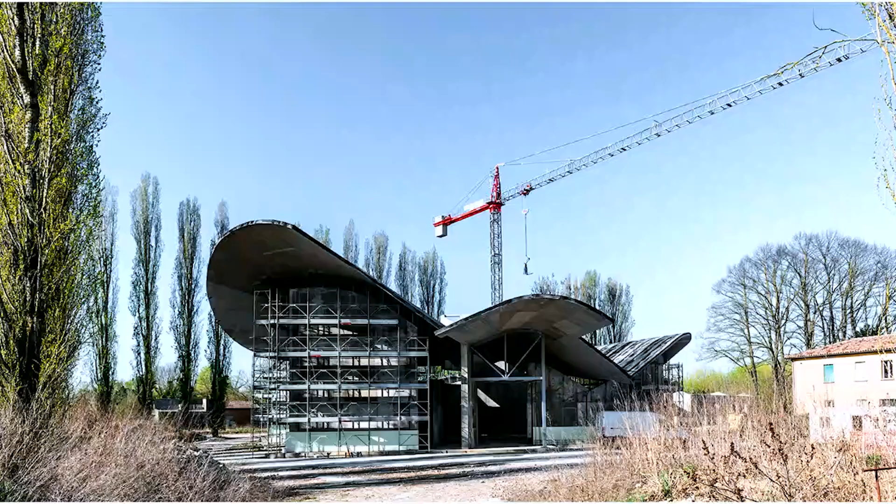And in making that, friends were telling me, oh really, it's a little outside the center, so they think that this is the periphery, but you walk from the center to here in 15 minutes. But it's a small city, so here it's nearly countryside.

They wanted a new church next to an existing one, with also the house of the priest and other facilities. And we started by saying, well, instead of copying the typical churches from Ferrara, why not imagine that something is coming from the sky, something new, something special, like a balloon.

And with this idea we started with a series of collages. We very often use collage, and the collages were becoming three-dimensional. And now, during construction, it was very beautiful to compare this small collage and the reality, which were very similar.

Actually, when we were looking at that, friends were telling me, oh really, it's like instead of a church, it's a collision of an airplane. But the real thing is, at the end, very similar to that. It's responding to the first sketches and to the first ideas.

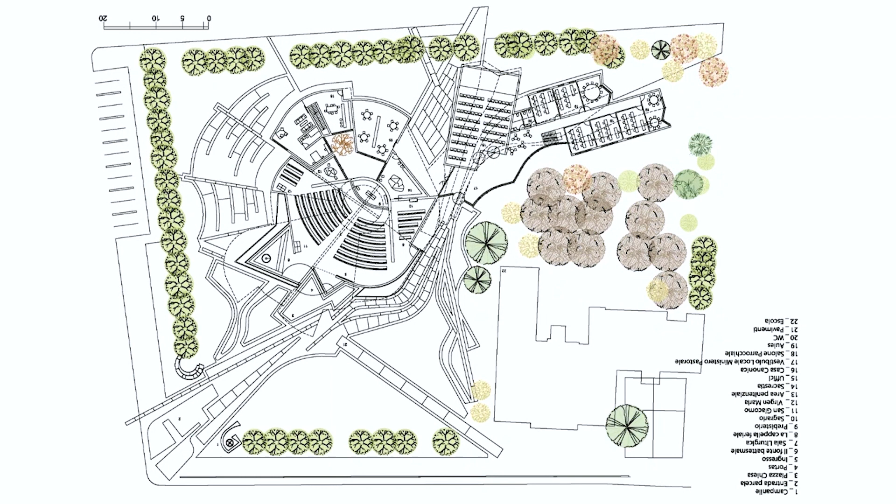And also this sketch of a kind of round building with a kind of line behind is so similar to what we built at the end. It's a church embedded with a house, embedded with the classrooms, and with the place where the people of the surroundings will meet.

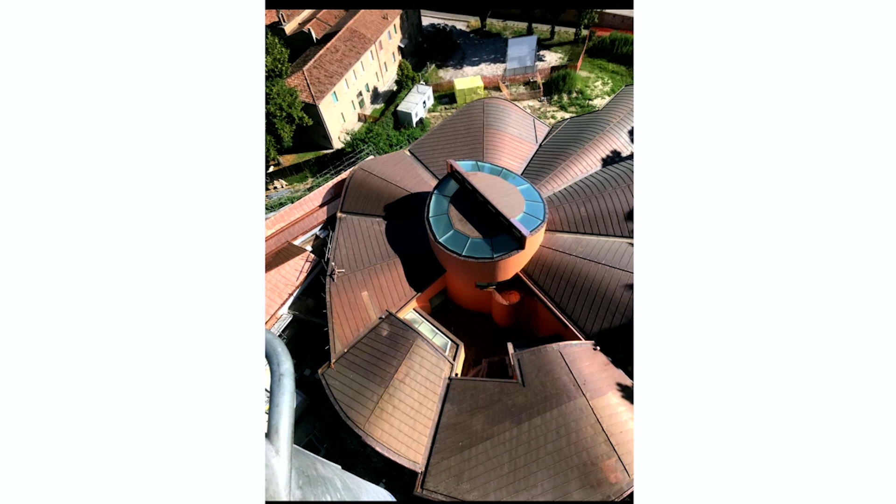And we could be on top of every detail, choosing the materials and spending time to think how the wooden roof that we were thinking could work.

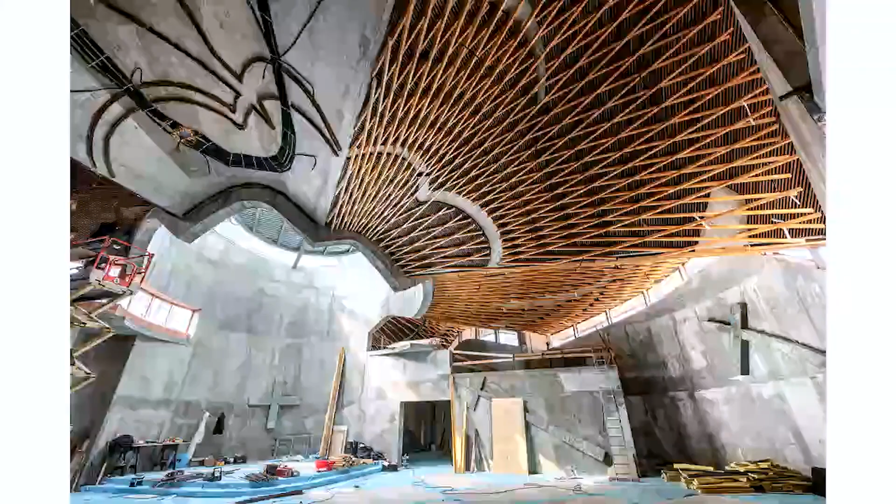At the end, we had to choose a cement shell, but we needed the sound acoustic ceiling, so we introduced the ceiling for the acoustic reasons. And these are images of the process. The process was very nice.

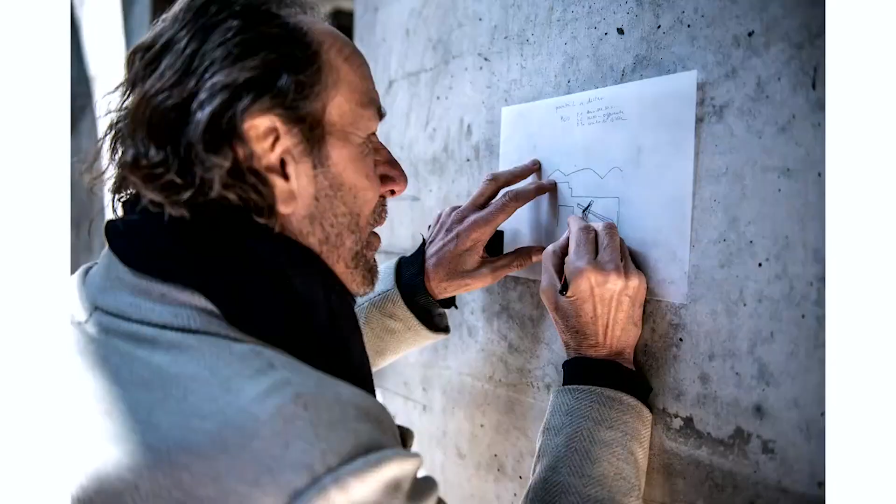And we had fantastic collaborators, let's say. We had a liturgist, who is someone who tells the artist and the architect how to implement the ritual, the liturgy, through the physical things, through the physical place, through the physical pieces of art.

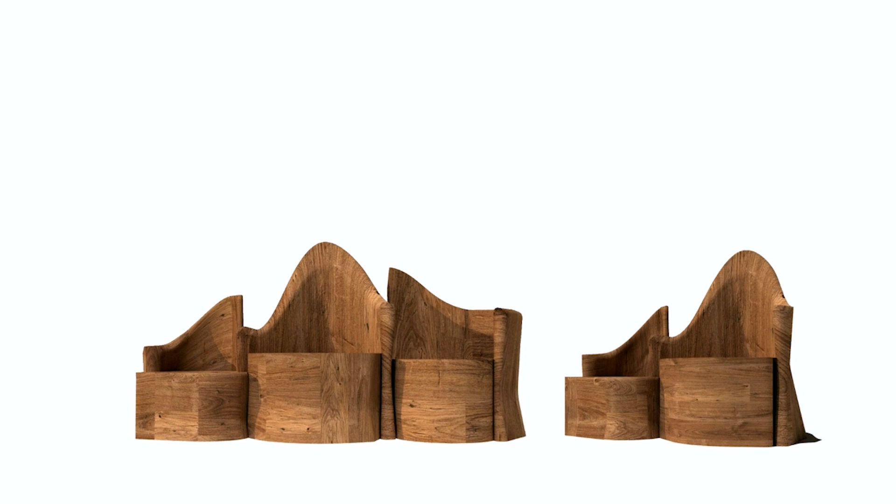He was looking at how we would do the altar, and we were proposing something like a trunk of an olive becoming an altar, or how we would do the seating. We were also insisting on this idea of making pieces of trunks become the elements, and then we tried to do that in a kind of a cheap way.

Of course, a church never has too much money, so we put together these different woods and worked with them so that they could become the base for every different element you have to introduce into a church. So the church now exists. The acoustic roof became very important because it introduced a warm feeling of wood inside the church.

The rest is cement and stone for the pavimentation and the altar. The elements are pieces of wood which create the base for an old Virgin, for an ostensorio, and a reliquario - all the things you need for the ritual in the church. We were really looking, and we found some old beams inside the roof of the main building of the city, so we could reuse them.

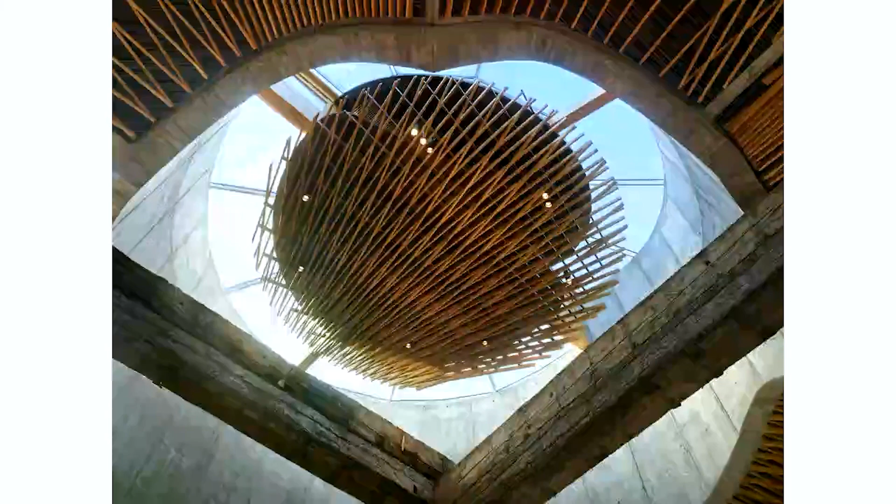It's a montage, but you don't notice. A big cross is on top of the ceiling, so it's really the cross making the main gesture of the space. Cucchi repeats this with many crosses, some like this one with little stars and planets around, done with ceramic pieces. The piece of the altar is like that, and the elements and the art in the back, and the lamps, are all working together to try to create this space.

This sacred space that our liturgist, our trainer let's say, was asking us to do. He was always saying, well, we never know if you can succeed in making a space which gives this feeling of being sacred. Maybe the best proof is when it's built, to see if a boy playing with a ball accidentally kicks the ball inside the church. If he goes on playing, then the church doesn't work.

If he stops and feels something, then it means the space is working and is giving this feeling that something special is happening, that this is a place with a certain sacred situation. And of course, what can you do? You can only try your best, and this is, I think, what we do.

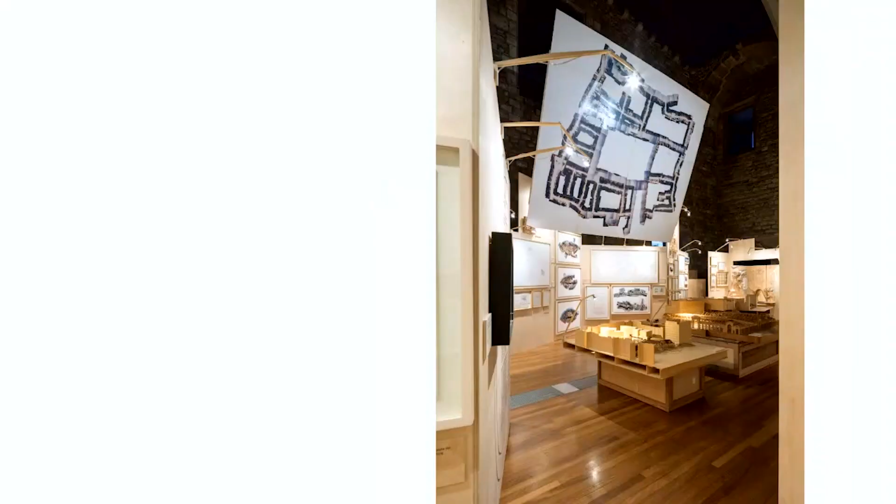Bringing, for example, the furniture, as here in Milan, or making exhibitions in a special place in Barcelona about some of the projects, or in another museum in Barcelona about the photomontages he made during all his life - we have more than 900 of them. And we're also indicating that we are going on with that, going on with the spirit, and the office is still working, doing a lot of things.

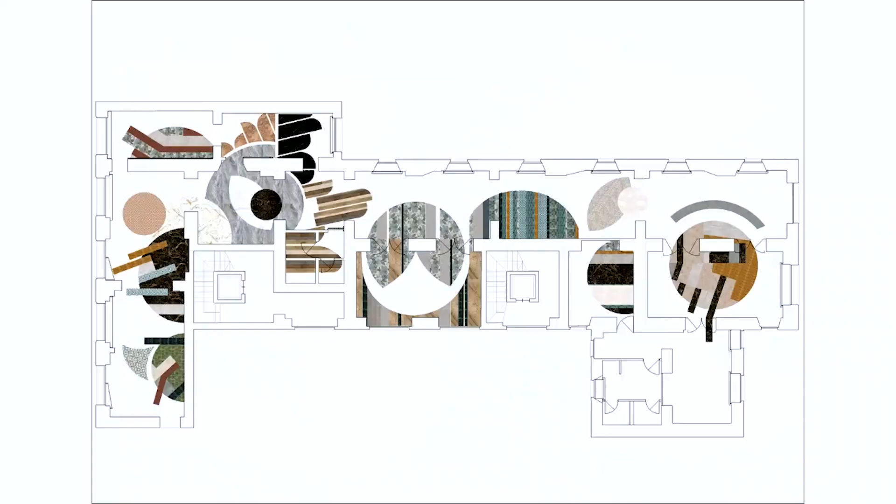So I think now we have a lot of images. I'll pass them like that, so you see all of them, but very fast, no? You're a student of architecture.

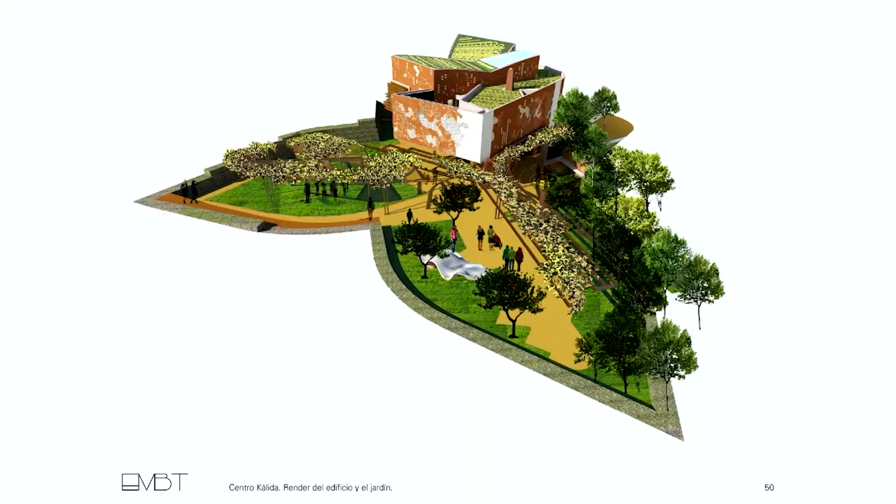This is the best project, and I don't have time to talk about it, but it's really influencing me, because it's one of the Maggie Centers outside the UK. The idea of this place is to make people receiving oncological cures inside the hospital escape the hospital and go somewhere where they feel at home. I think this is the most important lesson I learned recently - making places where you feel at home.

So we started with home, and we finish with a home which serves people with an oncological situation. I understood with this building that what we try to do from now on, when we do a city, a public building, a university, everything, is to make it feel like home. I learned it from here, and I leave the lesson here because it's too much. Thank you so much.